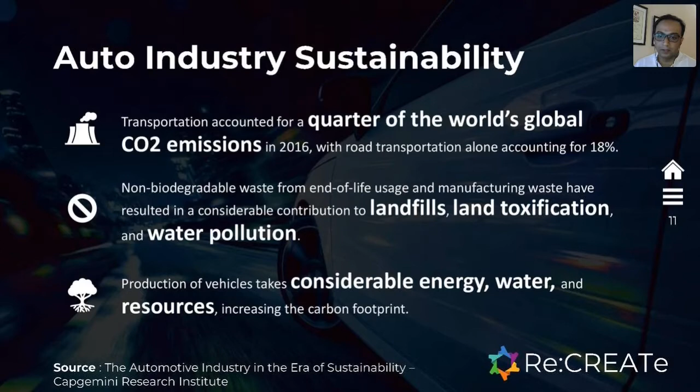One of those being, again, related to climate change, is transportation accounted for about a quarter of the world's global CO2 emissions, and road transportation alone accounted for about 18% in 2016, which is fairly substantial. Non-biodegradable waste from end-of-life usage as well as manufacturing contributes to landfills, land toxification, and water pollution. And from a life cycle standpoint, production of vehicles takes up a fair amount of resources, energy, water, which when you layer it across the life cycle and also look at the carbon footprint, all of that adds up to be quite substantial as well.

What the research also found as conclusions is that within the auto industry, sustainability is being looked at as a strategic issue, and almost to the point of part of organizational purpose. So it's no longer at the periphery. It is very much front and center in terms of how companies are moving forward on sustainability actions, and also how they see themselves and what that relationship means to their consumers and stakeholders at large.

Not surprisingly, sustainable R&D and sustainable manufacturing, which is closer to the core of what the industry does, receives greater attention from companies. And two critical areas have been identified in terms of driving maximum sustainability impact in the industry. One is ensuring that electric vehicles are truly sustainable, and the other is incorporating circular economy practices across the value chain. And this is really where remanufacturing fits in, looked at through that circular economy point of view. And I want to quickly talk about what remanufacturing is.

Many of you may already be familiar with it, but part of the work that we do is sensitization about remanufacturing and also clarifying what it is and what it isn't. And I think there's some utility in reinforcing that messaging every time we have an opportunity.

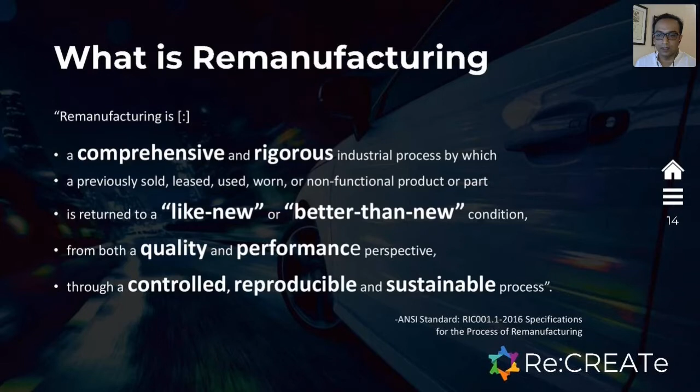And in talking about remanufacturing, it's also worthwhile to talk about what it isn't. There sometimes is this danger that words that have a re before them, like recycling, reusing, repurposing, all get lumped together. And so remanufacturing gets lumped into that, as some kind of recycling activity. And this is completely not true. Remanufacturing is extremely specific in terms of what it does. There are standards associated with it, and you're looking at bringing a product back to a functional and quality level which is as good as new, if not better.

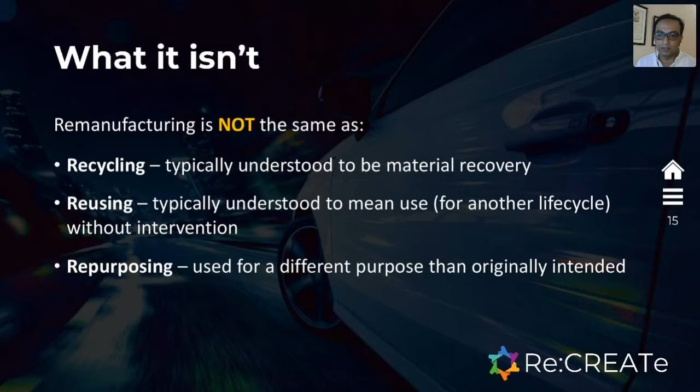So it is not recycling, which is typically understood to be material recovery, nor reusing, which is essentially giving a product another life cycle without any major intervention. Certainly not repurposing, where you're looking at a different purpose or use altogether. Repairing comes close, but it's also not the same thing. Part of it is the quality that you get at the end of it, as well as the warranty that's assigned to the product.

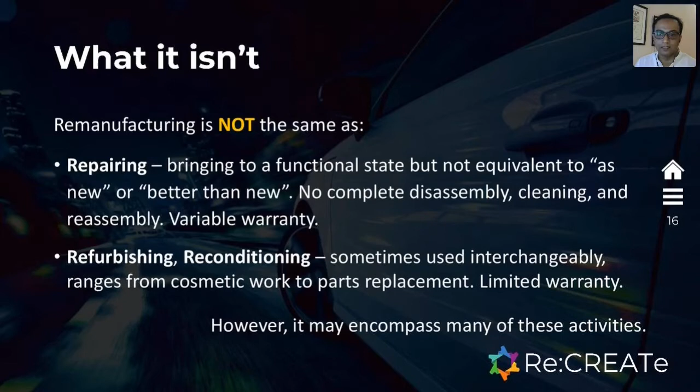Remanufacturing sometimes is interchangeably used with refurbishing and reconditioning, not necessarily in a broad kind of way, but there are some industries that use those interchangeably. I am a bit of a purist in that I stick to remanufacturing, especially because there is that ANSI standard that puts a clear stake in the ground as to say this is what it is. And so there's clarity and value in sticking to that, so as not to confuse remanufacturing with other elements of that circular economy closed loop model.

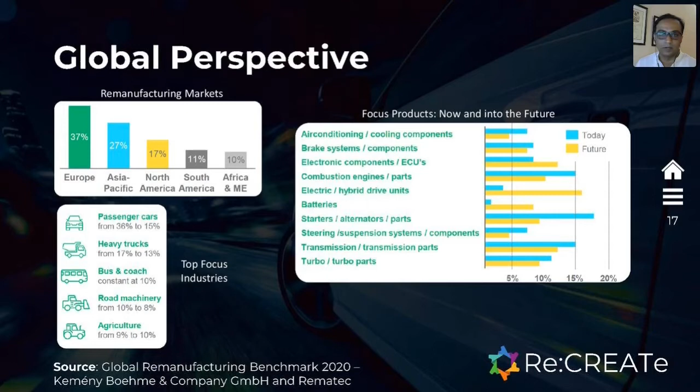There still will continue to be remanufacturing occurring in traditional automotive markets. And really that's where, from a transitional standpoint, in trying to hit sustainability goals or carbon emission goals, remanufacturing has some real value and utility.

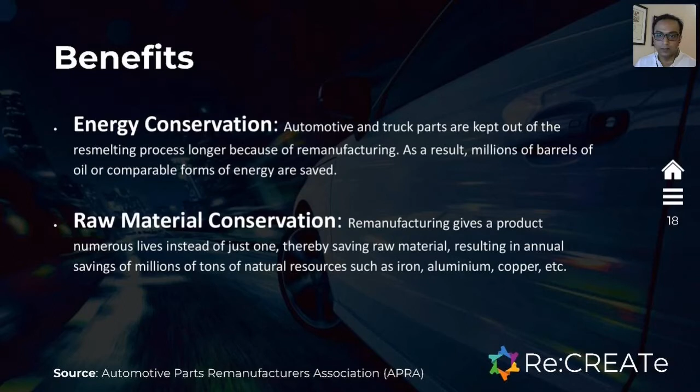There are benefits to remanufacturing, energy conservation being one of the most significant, especially from the standpoint of looking at, again, across the life cycle of products. Things like resmelting won't be necessary if you can keep a part that's already been formed through multiple life cycles. Same goes with raw material conservation.

And I'm running through these fairly quickly because you will get to hear in a little bit more detail some of these elements from Todd. But what I'm trying to do is to give you kind of a big picture, and then the details will get filled in as Yash and Todd share their presentations as well.

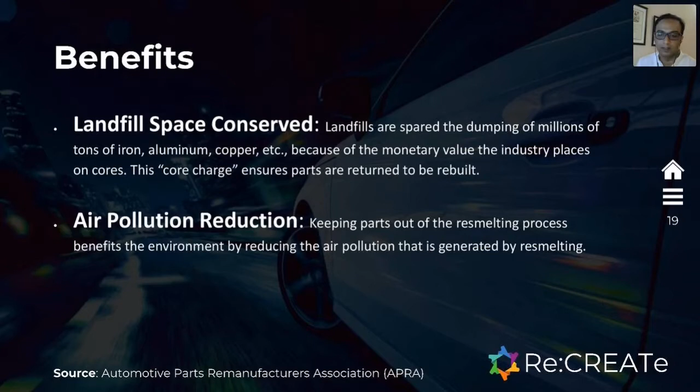These are direct quotes from the Automotive Parts Remanufacturers Association. One of the pieces also is air pollution reduction, again, related to the life cycle side of things, where going further back a few stages in the life cycle has impacts. Electric mobility is really where you're going to see localized air pollution reductions by virtue of the switch to battery-powered vehicles. From a numbers perspective, studies have shown that 50% of a starter can be recovered.

Again, looking at it from a totality standpoint, in the US, that equals about 8 million gallons of crude oil being saved in steel manufacturing, over 50,000 tons of iron ore, 6,000 tons of copper and other metals. So really, it's worthwhile to look at simply from the standpoint of what can be mitigated and how something that already has embedded energy, labor, cost built into it in a particular form and shape can be given multiple life cycles without compromising quality.

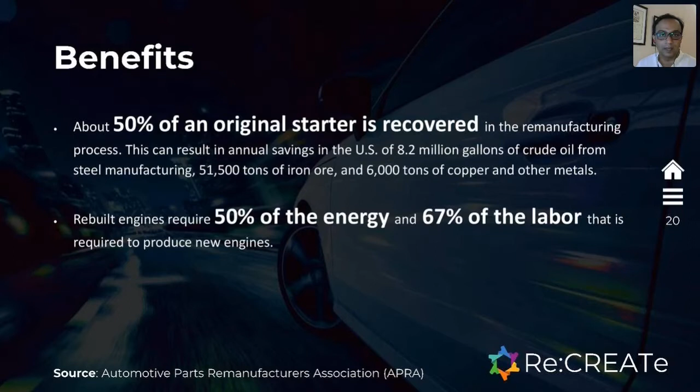Rebuilt engines can require 50% less energy and 67% of the labor required to produce new engines. From a labor standpoint, it's worth considering also that while there might be labor reductions on one side of it, there can be huge job growth and employment opportunity from the standpoint of the reverse logistics that come into play, as well as the disassembly elements that come into play from the standpoint of being able to remanufacture.

Remanufacturing certainly isn't a panacea, and I don't want to give you just a rosy picture. There are challenges that are part of it, including the technology challenges that come with shifting technology, especially in relation to electromobility. Pricing also is something that factors in significantly, especially in terms of getting economies of scale, bringing in more cores back.

And so a core essentially is a part or product that's reached the end of its useful life. In remanufacturing industry terminology, cores are those end-of-life parts or products that are then brought back into the industrial loop to be remanufactured. And in that sense, availability of cores, competition for cores, the quality of the cores that are being returned, all of these factors are challenges.

And how this gets implemented in India, some of it we'll hear from Todd on how it's already being done. But from a future standpoint, these are considerations that will have to be looked at closely, especially in terms of reverse logistics and formalizing parts of that reverse logistics chain.

From the perspective of where things are in India, it's the 5th largest market in terms of auto sales in 2019, 7th largest manufacturer of commercial vehicles. I'm not going to get into the details here, but this is really the part of the presentation where I pass it off to Yash, who will give us more details on what the state of the current market is. Cummins and Volvo are really the 2 companies that are known to remanufacture in India. That doesn't mean that there aren't more. This is based off of research that's already been conducted from a few years back.

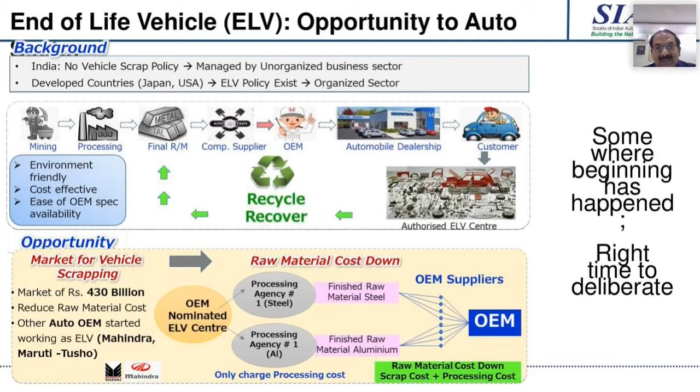So this was just the beginning of these words, whether it is recycle, reuse, or remanufacturing. I will relate this further through this slide. When I say remanufacturing, there are certain aspects connected to it. As of now, the challenge for Indian automobile after sales is there is no quality regulation for what is being sold in the aftermarket. So the first pillar of this will be quality. Of course, it will cover the safety aspect also. This is first to be addressed through rules and recognitions.

Recognition means remanufacturing should be considered as a business line, and appreciation has to happen for this sector, for its future contribution to the reduction of imports, and its future contribution to making India more competitive.

Secondly, while we say vision given by our Prime Minister Modi, Make in India, this itself is creating another big opportunity for Make in India. Now I will relate this to aftermarket business. So aftermarket business, of course, has two aspects. One, we call it as current models, the models that are being sold.

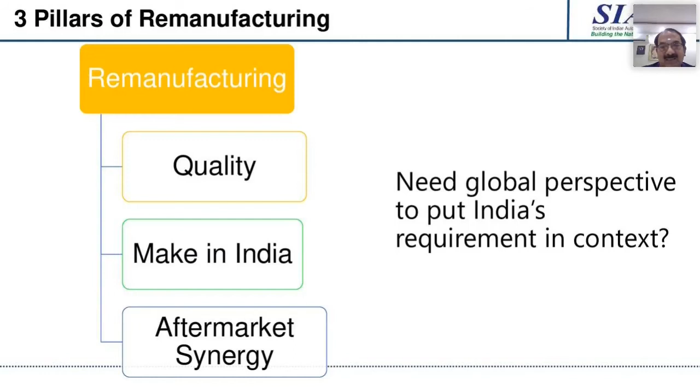And my understanding is maybe 20 years before, they must have had a similar situation to what we are in today. Some standards must have been framed, some discussion on quality standards laid down for this remanufacturing. As a leader of the Remanufacturing Association, you must have put in efforts. So when you share your journey, it will reduce the time to travel for us. If we can learn, maybe the 20 years you spent becomes 5 years, 7 years for us. That will be a kind of help.

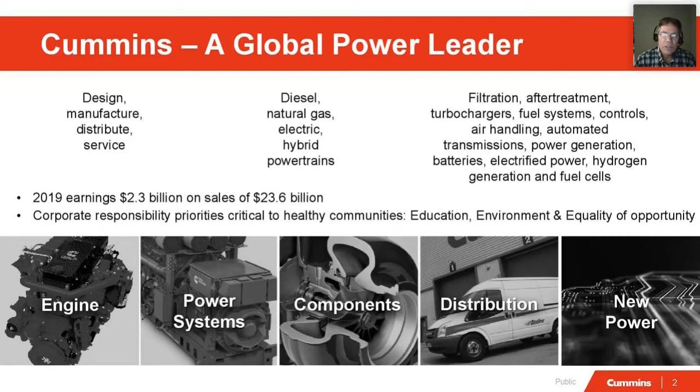And then on top of that, there's a shift already happening toward electrified power. There are some applications like urban bus where that makes economic sense right now, and that shift will continue as the technology improves. You can see the numbers there to give you an idea of the size of Cummins, about $24 billion last year. I'm also glad to be part of an organization that really emphasizes corporate responsibility in three areas: education, a little bit more about also commitment to the environment, and I know that this comes from the heart of our leadership, and it's really been part of our history. We are organized in those 5 divisions, as you can see down at the bottom.

Let's put some numbers to that now. We're in about 190 countries, 60,000 employees. Last year, we built over 1.4 million engines. We largely own our distribution. We spent about $1 billion last year. We started in diesel in 1919 and remain headquartered in Columbus, Indiana.

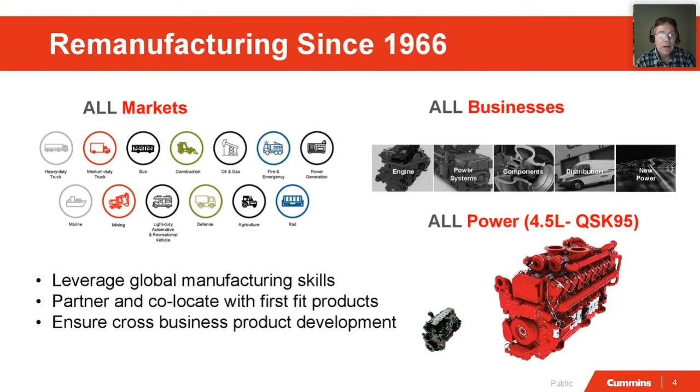We've also been remanufacturing for a long time, over 50 years. And we support all those same markets where Cummins supplies new products. Let's take a look at the products. There's a whole list here, but let's look at those a little bit more.

So engines. We remanufacture engines. What's the context there? A couple. One, there could be a failure, a catastrophic failure, where it makes economic sense to swap the whole engine instead of repairing it. Or there are other applications like a mining truck that will easily consume 4 engines over its lifetime. And so now we're not just talking about remanufacturing kind of as an option that a customer might consider at some point. For some applications, it's absolutely expected to support that high value asset over its life cycle.

The other kind of things you'll see, cylinder heads and turbochargers, connecting rods, those will be parts typically used for an overhaul. Let's say the truck is at midlife, the engine needs to be refreshed, and so this will be an overhaul event, and those components then would be replaced.

There are others in here, like a fuel system, a fuel injector in the lower left. Those are small, but they're high value, high precision, tolerances on the order of microns. They tend to have significant surface engineering, specialized coatings. And these things have a tough life. They're operating at 17 hertz, operating well above 2,000 bar pressure, and they might need to be refreshed at some point during the life of an engine. And so those make a very good remanufacturing candidate.

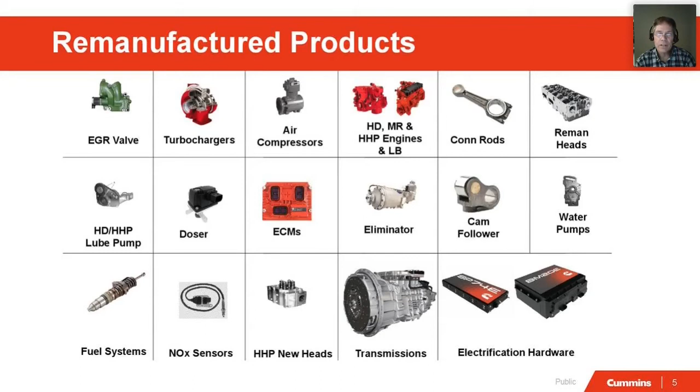And then in the lower right, you're starting to see some newer products, transmissions, automated manual transmissions, as well as electrification hardware. Those images are for very large batteries, but there'll be other components as well, traction motors, power electronics, that will be remanufactured as well.

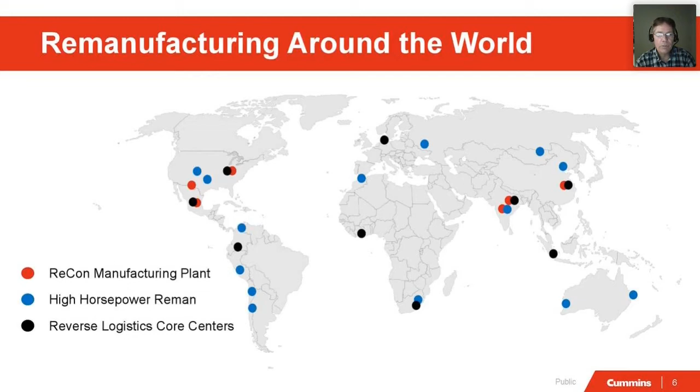We do this around the world. The red circles represent our remanufacturing plants for our smaller products. The core is returned, we call that reverse logistics, right? Where the core, the old product, has to come back. We've got reverse logistics core centers around the world represented by the black circles. Those are the collection points for the core that is then shipped back to the remanufacturing plants. The larger engines, of course, are heavy, and the transportation is expensive. And so we tend to handle that more on a regional basis near large populations of engines, and those are represented by the blue circles.

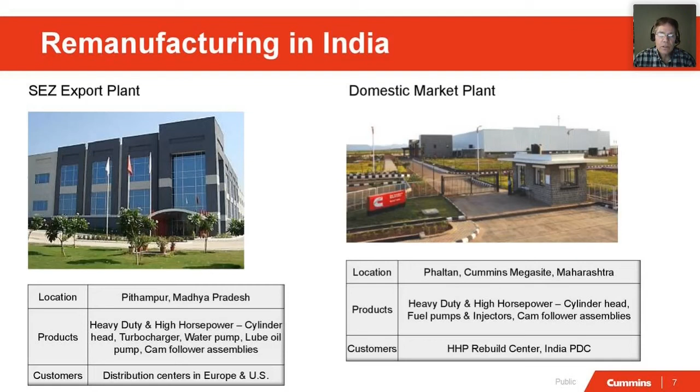We've been remanufacturing in India now for about 10 years. We've got an export plant in Pithampur where we produce both heavy duty and high horsepower components listed there. We also have a domestic plant on the Cummins mega site in Phaltan, a couple hours away from Pune. And there again, we're focusing on the heavy duty and high horsepower components. Those are supporting both the India Parts Distribution Center as well as the high horsepower engine remanufacturing center.

Rajiv provided a nice overview of the process steps. I'll go through those real quick again, but highlight a few of the technologies that we've developed along the way to facilitate that. The first point I'll make is, again, this is a factory-based process. These steps are typically occurring on a small line as opposed to some benchtop process. But it begins with disassembly. And you can appreciate that these products are operating for a number of years in environments where they may be exposed to road grime or other dirt, and there can be some external corrosion. And so simply taking them apart can be difficult. And so we've automated and applied some technologies to facilitate that.

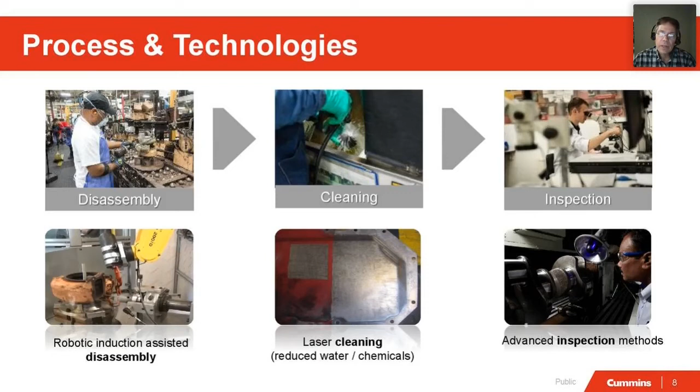The next key step is inspection. We have to establish that the now clean core doesn't have conditions that would interfere with its next service life or that require repair. And so we've got various optical and other type methods to inspect the core.

Next comes restoration or salvage, and there's a variety of things that we do there. There could be mechanical means for inserts, sleeves, bushings. Then we've got material addition technologies, thermal spray to build up worn surfaces, or more structural methods, traditional welding, or more advanced welding, like laser deposition, where again we can build up that worn surface, and because we can choose the material often, the resulting surface actually can be better than the original.

If a cast iron component was the original part, then that wear surface is cast iron typically. Well, here we can choose something that's even more wear resistant. And so arguably the remanufactured product is even better than new. And then finally, we've got the assembly and testing step, where we will typically use a version of the original process. We certainly have and apply the original specification, and then we can apply the same or similar test method as well.

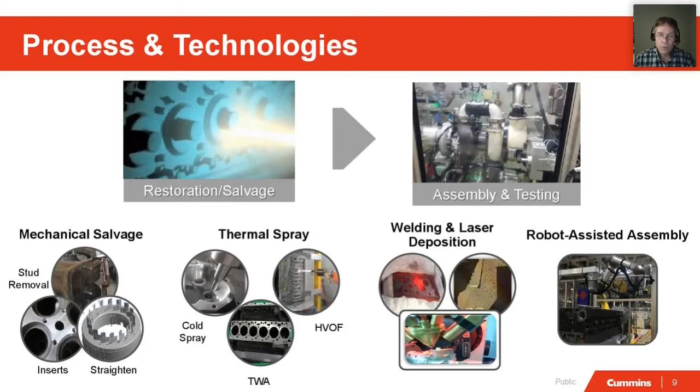In the middle of the life cycle, we may have the competition coming on the scene, what we call will-fits, value price. Then remanufactured products can help meet that need. It's same as new warranty, same as new performance, same as new global sales and service support, but at a value price. And so that gives those customers exactly what they're looking for.

Then late in life, it also helps us support our customers once the original suppliers, due to the loss of volume for that particular part number, may become expensive or may not be so interested in continuing that supply. So remanufacturing can help us support the tails of the life cycle. And we'll support our products for literally decades. We would still remanufacture various components for 40-year-old engines.

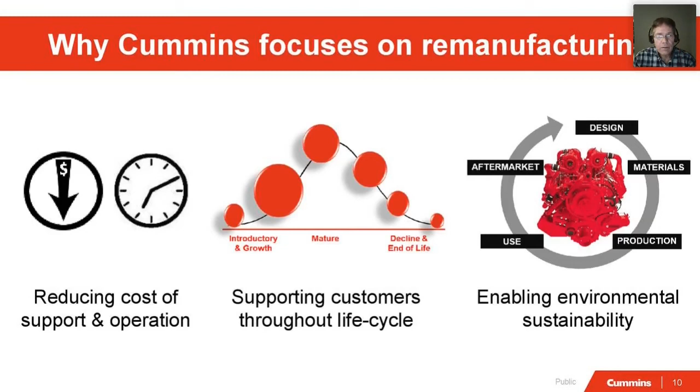Increasingly on the right also is the connection of remanufacturing to environmental sustainability, and we'll talk more about that in a second. So first, from a customer perspective, what's the value proposition for remanufacturing for fleets and others that are very sensitive to uptime? After all, this asset is used to earn a living. And if it's down, being repaired, then it's not making money for the customer. And so swinging an engine or that major component with a remanufactured one is just faster, and it's a way to get that asset back to work.

Because it's a factory process to the original specifications, in our case, the customer is also confident in the quality. The core terms vary a little bit around the world. Maybe we'll get to that in the Q&A, but the idea is we make it simple: purchase the product and return the core. The graphics at the bottom help illustrate the process. That core is returned. We're able to apply original factory methods. We've got the original factory specifications. We apply advanced technology, supplement with genuine parts, and produce that very high quality product.

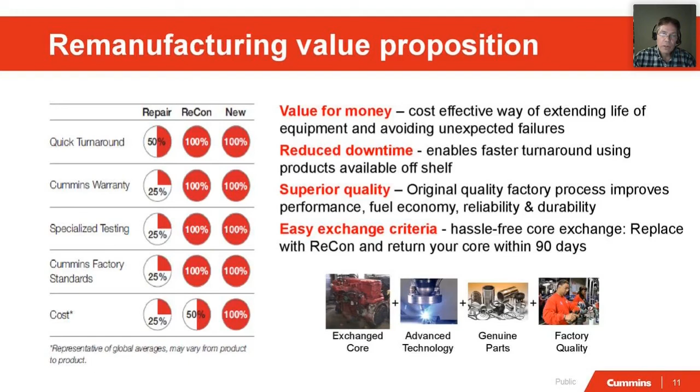Okay, let's start to pivot toward the sustainability and environmental perspective using some numbers from India. First, in the upper left, easily 75% of an engine can be remanufactured. We've got lots of high value iron and steel castings and forgings that are good candidates for remanufacturing. Going all the way to the lower right, over the last years in India, we've recovered over 10,000 tons of core, producing over 500,000 different units, shown there in the lower left.

Okay, so what difference does this make? Well, first of all, bottom center, this takes a lot less water compared to the extraction and processing of ore and making new castings and forgings. So we think we save 150,000 kiloliters of water every year. And water matters to us. We operate in water challenged areas, and we know as we think about the future that water will increasingly become one of those constrained resources.

The other thing is that not having to recover that ore and reprocess castings and forgings saves a lot of energy, with the result that there's less greenhouse gas emitted. There are a variety of studies, by the way, with varying degrees of material reuse that help validate some of the numbers that you've been seeing. I think Rajiv mentioned a 50% energy savings in the one case, and there are other analyses that show that number is even higher.

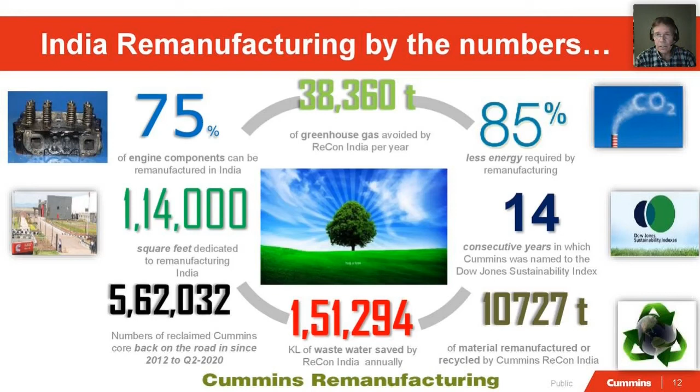Okay, continuing our pivot towards sustainability. Cummins is just finishing up a decade of largely meeting or exceeding sustainability goals relative to our own operational footprint. By that I mean the waste that we produce in our facilities, or the emissions from those facilities, or the energy consumed by those facilities.

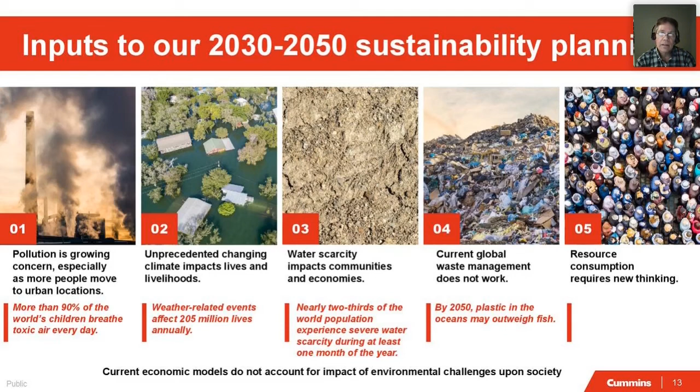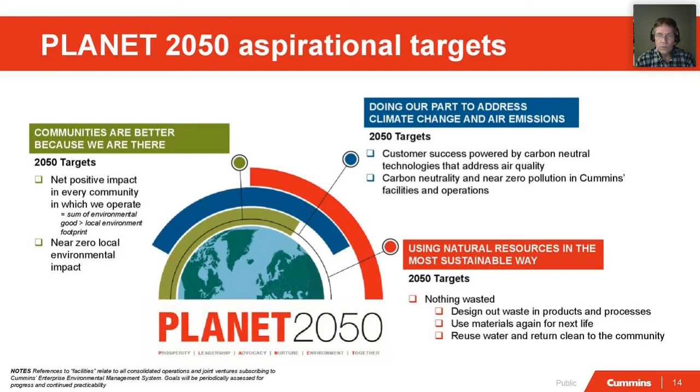Talking about 2050 is fun. Some of us won't be here, or at least not working on it.

I was the advocate for this concept of the life cycle plan for every part. It can be difficult to convince a designer to prepare for remanufacturing. They may ask, well, how do you know you're going to reman that? Or what will the volume be? And those are reasonable questions.

But on the other hand, we have to be more thoughtful if we're serious about these kind of goals at the front end of the product design, and say, hey, what's the plan for this product? So it seems to me that that's a reasonable starting point. And then oftentimes remanufacturing will be part of that plan and answer.

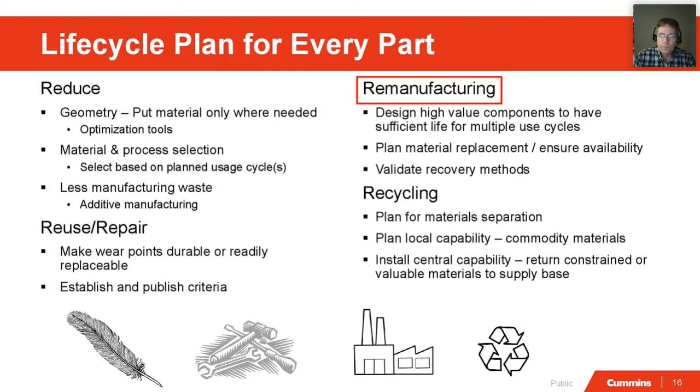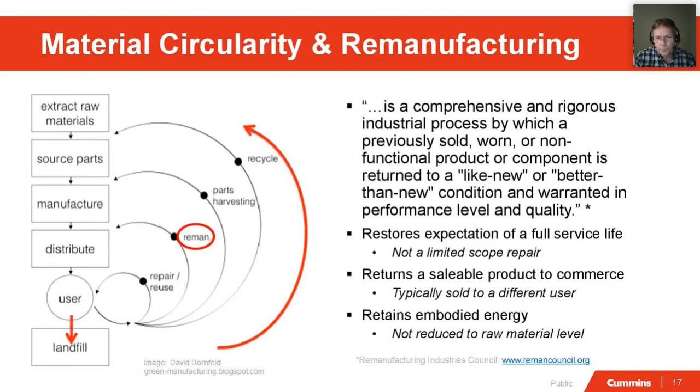But in summary then, remanufacturing is good for the customer: same as new performance and superior value. It's good for business. It helps us support our customers over the life cycle. And increasingly, it's good for the environment and part of our strategy for good stewardship.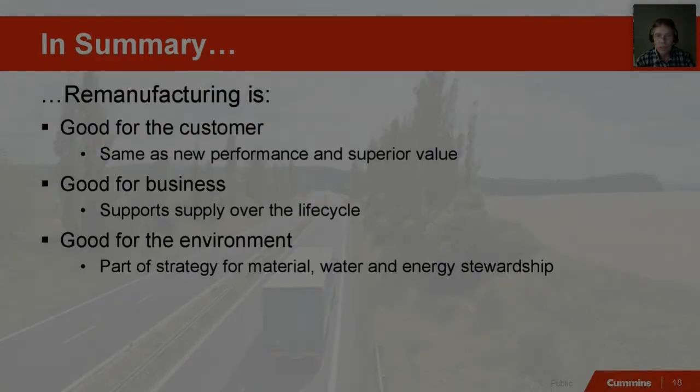Just picking up from where you ended, Todd, in terms of the connection to end of life vehicles, you touched on something that I was thinking of exactly, which is if any country or region is creating the infrastructure to bring end of life products back to some form of circular loop, there is certainly value in interjecting there and saying, don't turn all of this back into raw material level, but try to extract value by retaining parts and components that can in fact be used in current or future models. So some of that is contingent on design. That's really worth considering from the standpoint of where things go at the policy or industry level, what's done from a design standpoint, not just product design, but institutional design.

Yeah. Right. Todd, you've got this bird's eye view of remanufacturing globally. It's kind of open-ended as a question, but what may be nuances that you're seeing in how markets and industries and perceptions are evolving in nascent economies versus markets that are decades old, like the US, for example? What might be some considerations for consumers or even businesses that are coming into this not fully understanding but interested, and also providing that level of confidence that the product is going to perform at the same level? Do you have anything you could share in terms of how that differs in emerging economies versus more developed markets?